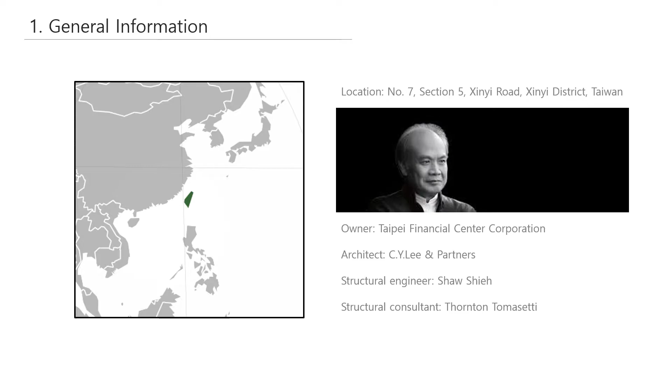Taipei 101 is located at the upper end of Taiwan. This place is not in the best condition for tall buildings since it's windy, and lots of typhoons pass by. Also, earthquakes occur often compared to the inland areas. Taipei Financial Center Corporation was the client, and C.Y. Lee and Partners designed it. Structural engineers and consultants also took part, examining its stability in such a bad condition as explained before.

The height to the top floor of Taipei 101 is 438 meters, and the height to the spire is 508 meters. It consists of 101 floors above ground and 5 floors below ground, and has a total floor area of 412,500 square meters.

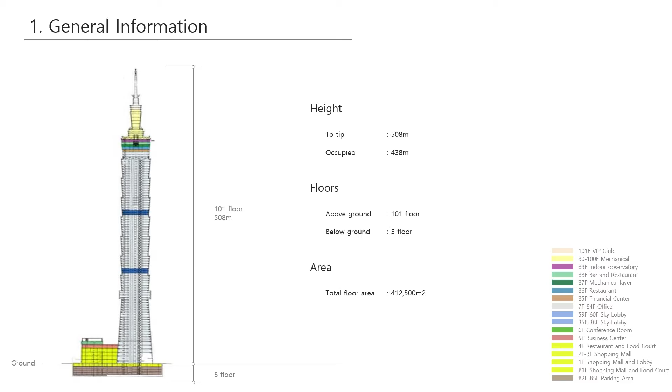In order to get to know Taipei 101 deeply, its history should be handled. First of all, in 1997, the Taipei Financial Center Corporation, the client, won the rights to lease the site for 70 years and to develop a building. This was the start of the famous Taipei 101. So, the construction began, and it was possible to see the first tower column in 2000. An interesting thing is that the city allowed this building to be 101 stories high after the construction had started.

In 2002, when the process was partially done, an earthquake of magnitude 6.8 struck Taiwan. Since Taipei 101 was designed to survive strong lateral loads, it was undamaged. Taipei 101 was completed and was opened to the public after 1 year. In 2009, Taipei Financial Center Corporation announced plans for green building, and 2 years later, it became the world's tallest green building.

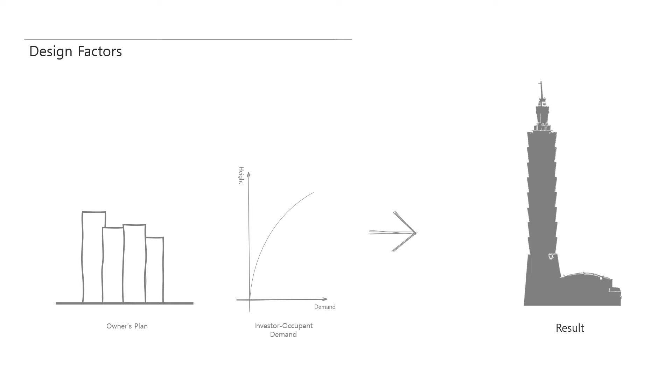Initially, the owner, Taipei Financial Center Corporation, planned lower buildings covering the whole block, but all the investors and occupants wanted room in the tallest building. A single tower was the best to please everyone. The unusual tower shape drew on local culture, including the regularly spaced joints in tall, slender indigenous bamboo and pagodas, by architect C.Y. Lee.

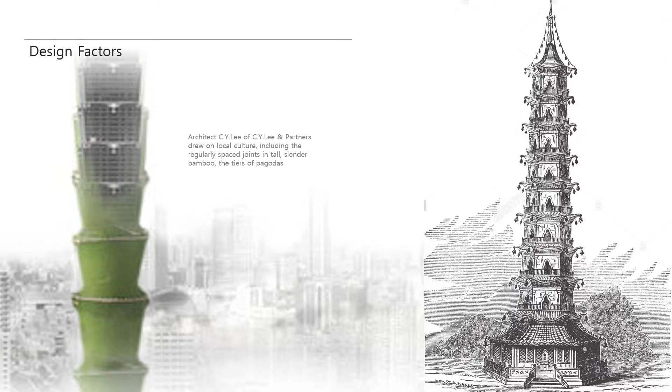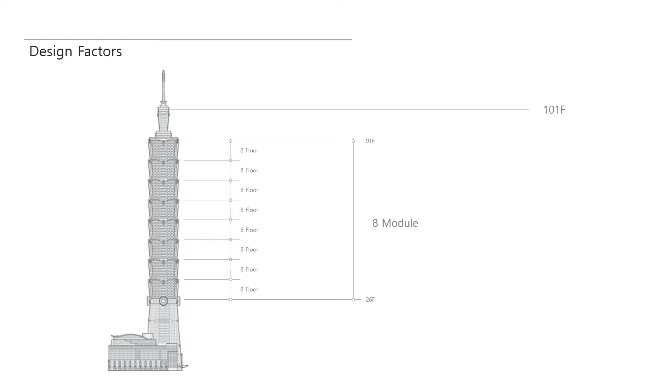The building has 8 modules on the upper body, which have 8 stories each, and the number 8 means luck, and the number 100 symbolizes perfection. 100 plus 1 represents further breakthrough and innovation and a new beginning.

A 5-story high open space, Taipei 101 Mall, effectively combined the urban pedestrian street, providing an entirely new experience for Taipei citizens. A multifunctional urban social space is provided on the 4th floor to create a cultural and fashion holy land for the city. Super-scaled structural elements enclose an enormous central space, utilizing the different moods created by the light filtering through the skylights at dawn and dusk, and creative interior design elements to exhibit the aesthetics of the new Taipei Life Society: discourse, experience, exhibition, and celebration, providing a unique and multifaceted urban living room for Taipei.

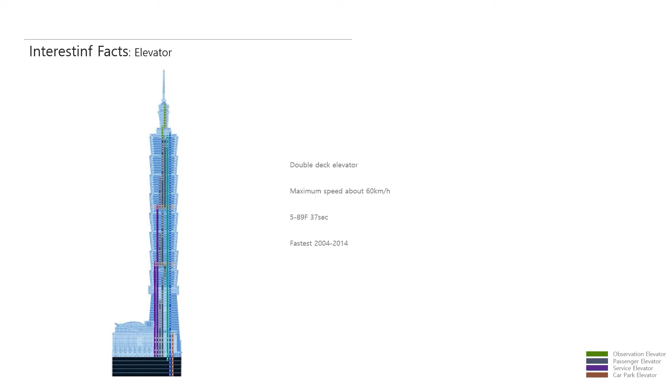Before we go into complicated stuff, we're going to spend some time knowing interesting facts regarding Taipei 101. It is well known for its fast elevators. We can rise from the 5th floor to the 89th floor in only 37 seconds. The elevator in Taipei 101 set a new record in 2004 as the fastest ascending speed in the world, which lasted to 2014.

Also, it received LEED Platinum certification. It was well developed, especially in Leadership in Energy and Environmental Design for existing buildings, operations and maintenance. There are 4 factors that we can look into. First, saving electricity usage became possible, especially regarding lighting. Second, water consumption was lowered. 28,000 metric tons of water was saved.

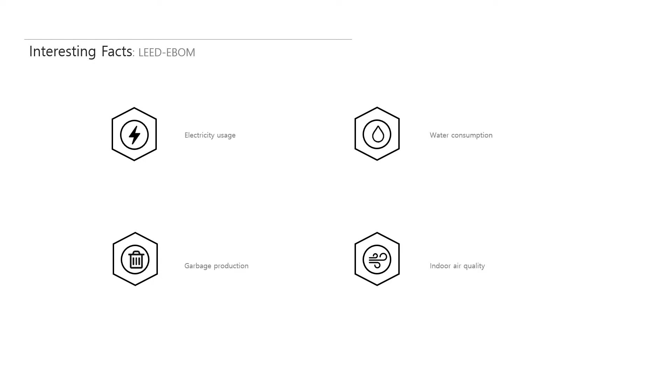Also, they worked on garbage production and made it possible for 1,261 metric tons of garbage to be saved each year. Lastly, indoor air quality was handled through the control of HVAC systems; applying improved algorithms for the chiller plant and changing the sequence of operation helped a lot.

Taipei, with 101 floors, weighs 705,130 tons. Unlike other buildings of ordinary size, such a large building has several considerations in construction.

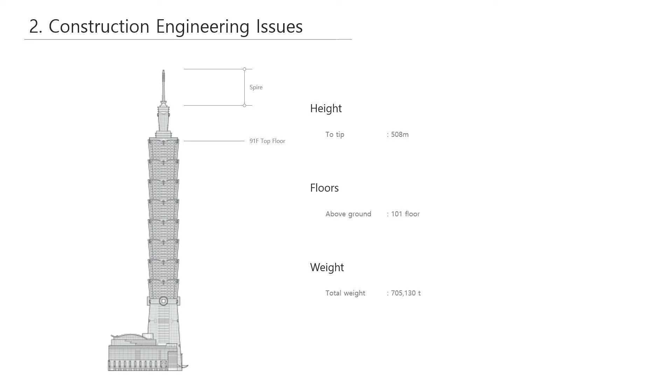First of all, when constructing skyscrapers, a well-planned foundation is required to anchor them to the ground. For a well-planned foundation, soils have to be strong enough to support the weight of the skyscraper. Topsoil and subsoil are not strong enough to support the skyscraper, so we must find bedrock deep in the ground. After finding bedrock, vertical beams are sunk through the soil until they are embedded in the bedrock as footings to secure the structure.

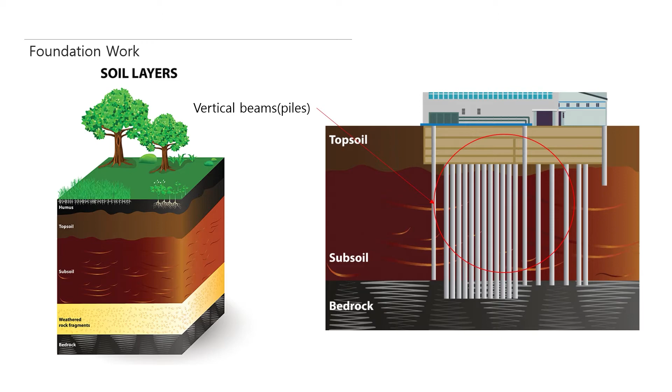Also, we have to think about the impact of the water table on the foundation of the building. The water table exists 2 meters below the ground, creating a huge uplift force. Slurry walls were constructed to prevent the impact of this water table, which are deep walls constructed on site to prevent water and soil caving in during construction of the foundation and excavation. These walls surround both the tower and the podium and are 1.2 meters thick and up to 47 meters below ground.

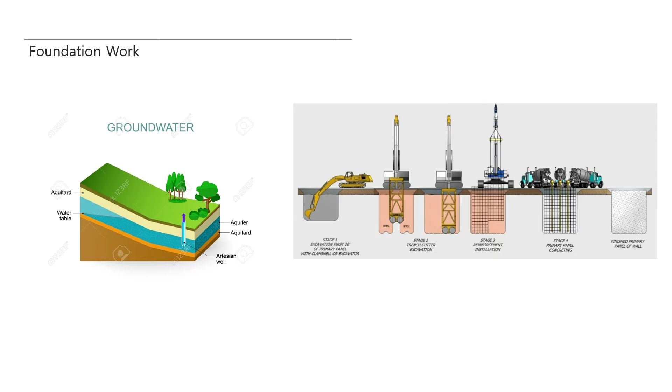Secondly, high-rise buildings are very affected by strong winds and earthquakes, so they need a structure to prepare for this. In particular, Taipei 101 is in a dangerous environment that witnessed a 7.1 magnitude earthquake during the construction and a Category 5 typhoon in 2015. Thus, Taipei 101 prepared various structures for wind and earthquake forces, the most famous of which is the tuned mass damper.

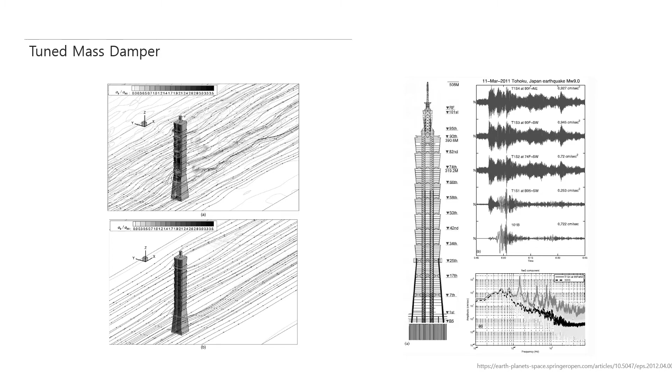At the top of the building, between the 87th and 92nd floors of Taipei 101, is a huge pendulum called a tuned mass damper, or TMD. The pendulum weighs 728 tons and is 6 meters in diameter. It is built of stacked steel plates and weighs 0.24% of the total building weight.

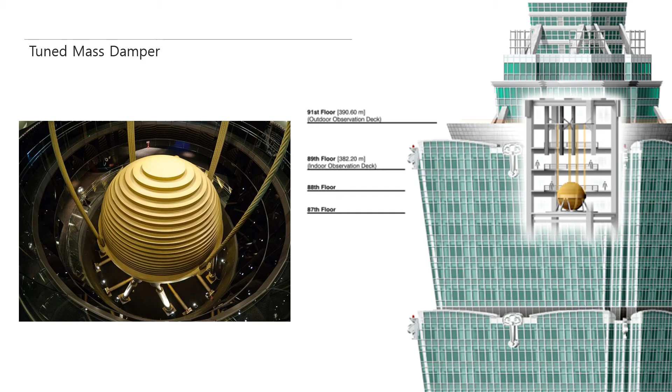This damper uses building motion to push and pull giant shock absorbers to convert motion to heat by forcing fluid through small internal openings. When the building sways, the mass will tend to move in the opposite direction. This removes energy from the building due to the wind oscillations and reduces movement. In the event of an earthquake, the sudden shock locks the mass for safety during seismic events.

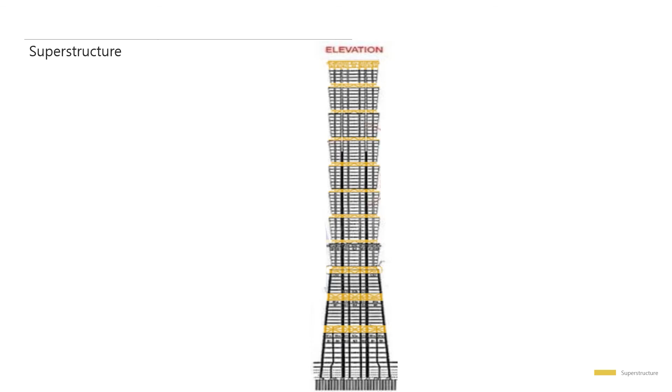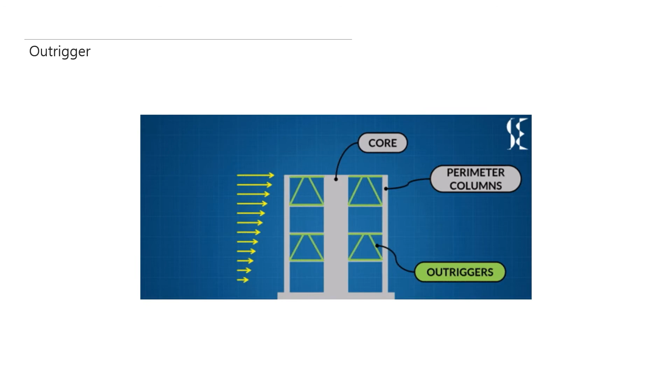Besides these structures, there are several special structures of Taipei 101, and let's first look at the superstructure of Taipei 101. The building used outrigger and belt trusses to imitate the joints of bamboo. This same structure was repeated 8 times to form the superstructure of Taipei 101. Let's learn more about outrigger and belt trusses, which are not only used to describe the shape of a bamboo, but also to add safety to the structure of the building.

Outriggers, as the name suggests, are extra structural members to resist the overturning forces. In structures, outriggers basically tie 2 structural systems together, which are the core and perimeter systems. When subjected to lateral loads, the column-restrained outriggers resist the rotation of the core, causing the lateral deflections and moments in the core to be smaller than in the system without the outriggers. The external moment is now resisted not by bending of the core alone, but also by the axial tension and compression of the exterior columns connected to the outriggers.

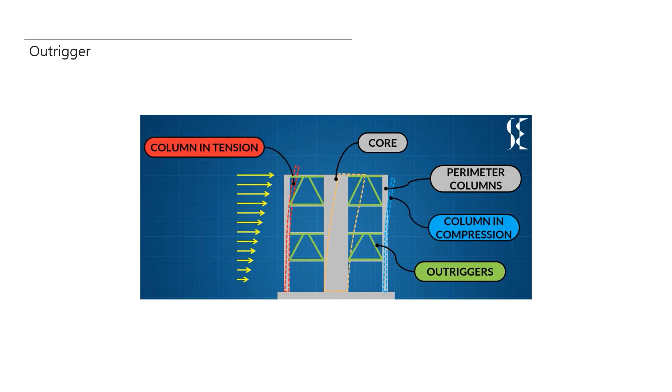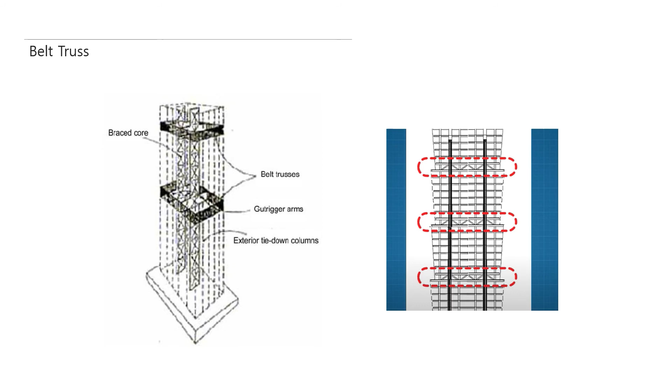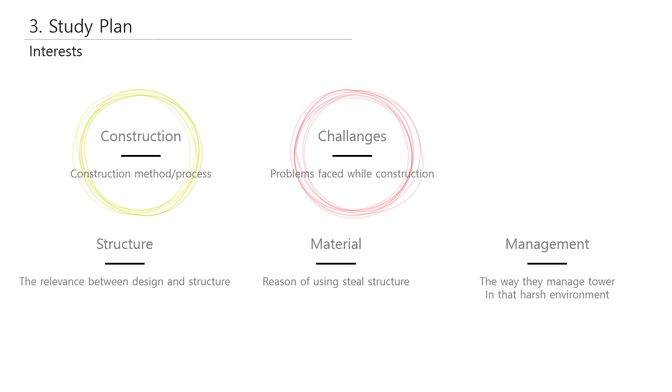As we were searching for the general contents, we were able to set the direction of the project. Based on further research of the construction methods and problems faced during construction, we will have a better understanding of the construction process. Also, we will study how each construction method solved the problems faced. This is the study plan we set for the further project. We will set a more developed and specific research direction next week. After entirely understanding the building, until week 4, we will study construction methods separated into specific components. Thank you for listening to our presentation.